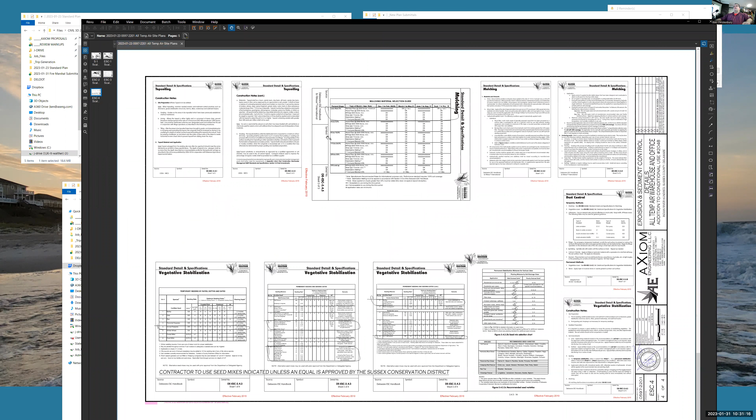We have in here for Temp Air. Site plan includes both the site plan and erosion and sediment control plan sheets. Typically, we're going to set up the same site plan that planning and zoning looks at as the only sheet that the fire marshal needs. They're not going to need all the other sheets.

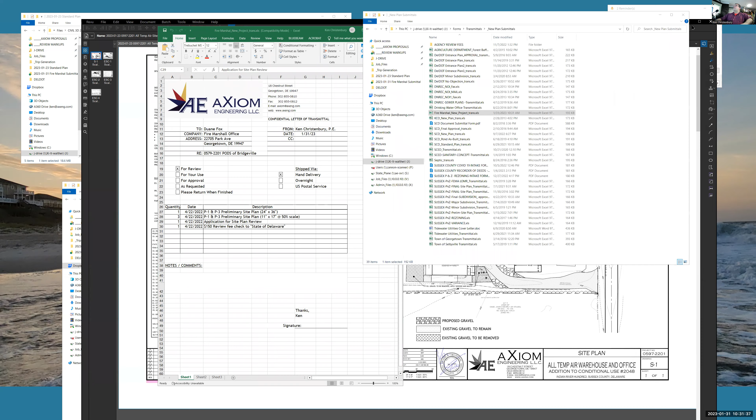So what is required? Well, I've given you a cheat sheet. You can go to this transmittal. You're going to save this transmittal in your submittals folder under a fire marshal folder. So file, save as, with this project docs, submittals, standard plan. This is going in the fire marshal folder. And then if you want, you can put a job number, 5972201.

First thing you do, change your job number to 5972201. All Temp Air. Down here, change this date to today's date, or the date you're making the submittal, 1/31/2023. The other dates should follow. I don't know why that one didn't. Let me go ahead and make that be 23.

What we do is we give them one 24x36 copy and then 3 copies on 11x17 plotted to scale at 50%. Then there's an application and $150 review fee. They're going to have to either harass our client or harass me to get the check for the fire marshal.

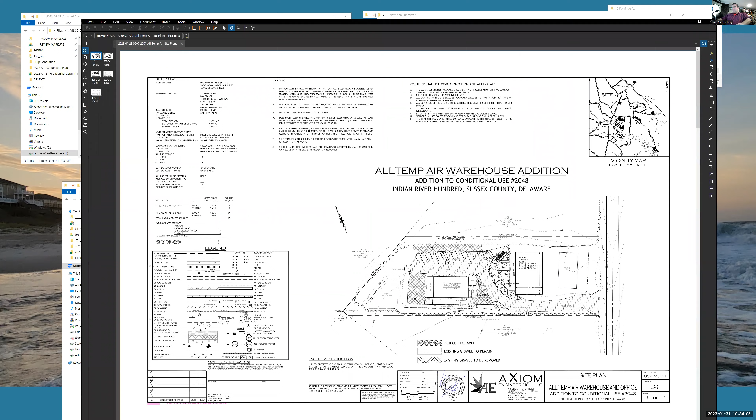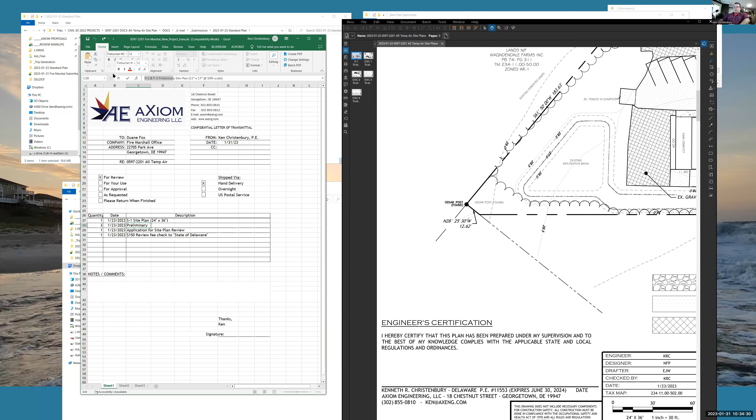So if you get this, we're going to want to identify our sheet to match our actual project. So in this case, it's sheet S1 is the site plan, and it has a date of January 23rd, 2023. So the actual date of the drawing is January 23rd. And it's sheet S-1, site plan 24x36, just one copy of that. And then S1, site plan on 11x17, 3 copies of that. So this is pretty much done.

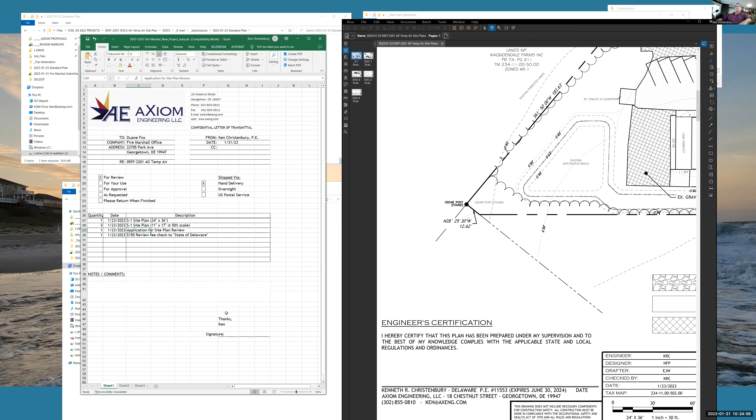You're going to print out a hard copy. You can change it to your name or leave it in my name. Somebody needs to sign that. We make a copy of that, or we scan that for our file, and then we'll take a photo of when the plans are dropped off in their bucket and add that to the scan of the PDF so we know when we filed it.

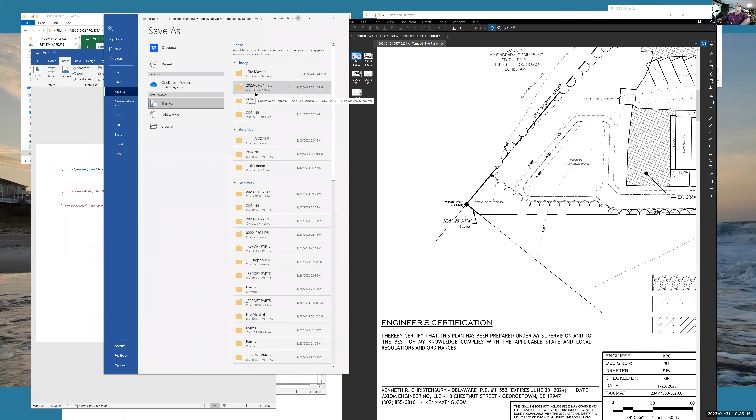Let's take a quick look at the application. So again, back to your cheat sheet. It's a Word document. They did us all kinds of favors and auto formatting things, and actually the way they've done it is a bit of a pain. It's read only. You're going to have to do a save as to get it into your project. Just browse into our folder, our same submittals folder. 597 docs. And go into the fire marshal.

Clicked the wrong drive. Stop. I'm crashing the software. Don't you love videos where Bill Gates steps in to help out? It's adding entertainment value though, which is good. Yeah, this is not good. I accidentally hit the P drive, so now it's looking for that drive, and that computer's turned off. This video is turning out to be a little longer than it needed to be. I may just stop it and do a next video, and whenever you're watching this, you can always just skip this part. Oh, got there. There you go.

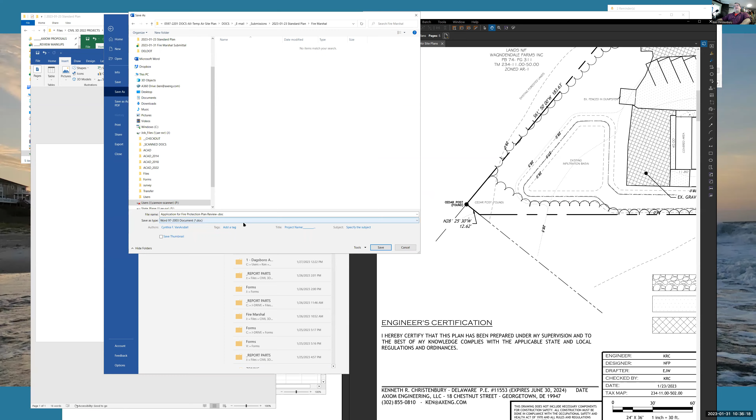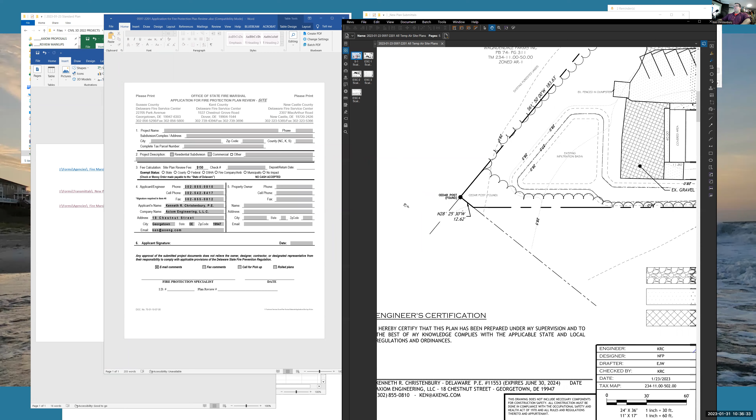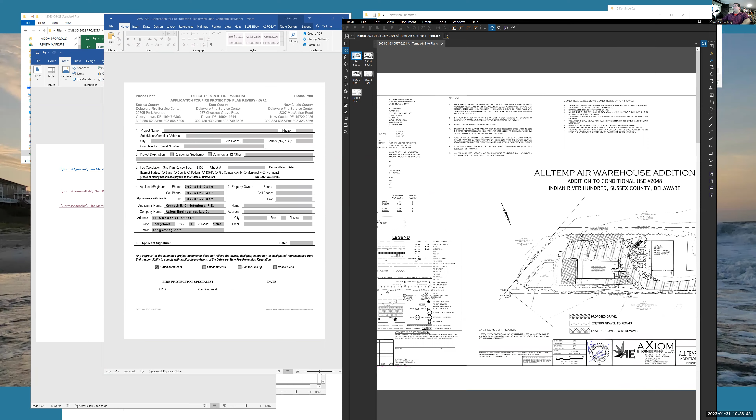All right. Throw in there the job number 05972201. We're mostly doing that so we can't overwrite our templates. So you're going to fill in the name of the project, which is usually right out of your title block. You're going to fill in the street address if you have one. In this case, we actually do. Normally, we do not because we're doing raw land. It's not that address. It's the 21171 John J. Williams.

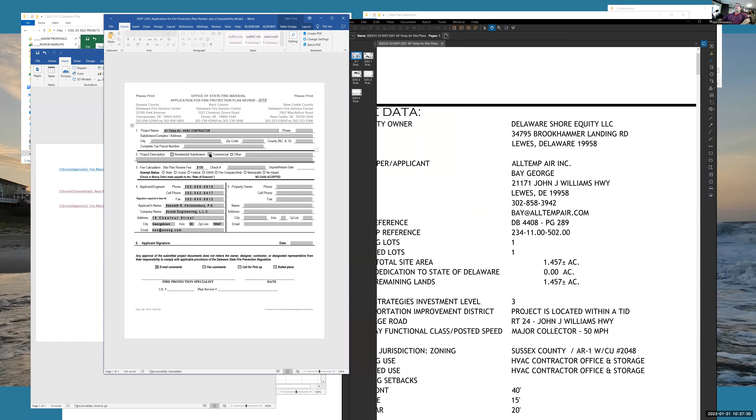Description, that's going to be simply, 3,200 square foot office and storage building. I would just put existing 3,200 square foot office and storage building and proposed 4,000 square foot additional building. Filling that information down here.

They actually let the engineer be the applicant, so we do not have to circulate this back to our client for signature. And we do not always get them to prepay the review fee because it's only $150. I'll usually write the check. We'll add it to their next invoice. So this one's fairly easy.

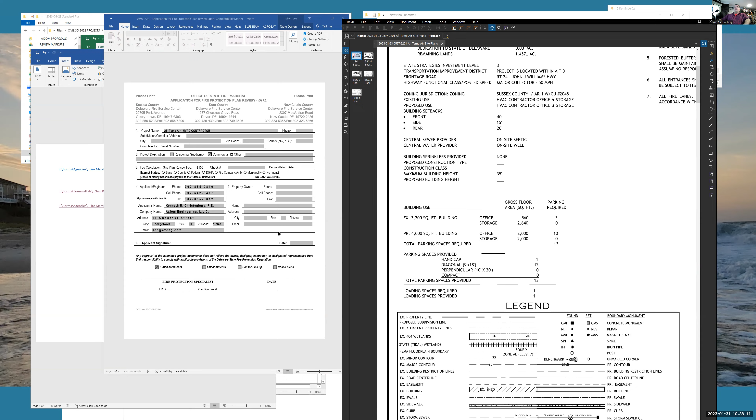So you're going to fill this out, print this out, print that out and initial it, and then print out the hard copies. Again, we're only doing sheet S1, so you don't have to do the whole plan set. And that's how easy it is, if your computer works, to throw together a Fire Marshal submittal.